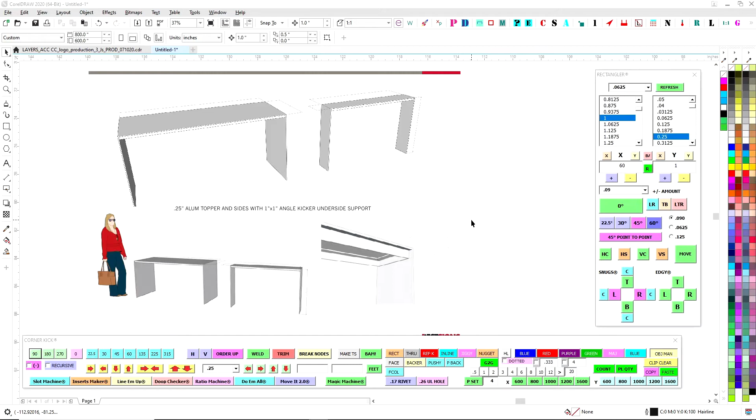Okay, so here's my penny's worth on this. Going by what you got here, I understand you got the 1/4 inch and you got the 1 inch frame. So the idea here, I understand, is trying to keep it clean. You're not going to be able to score and bend this. First of all, the 1/4 inch doesn't like to do that, but we only have 6061 in stock.

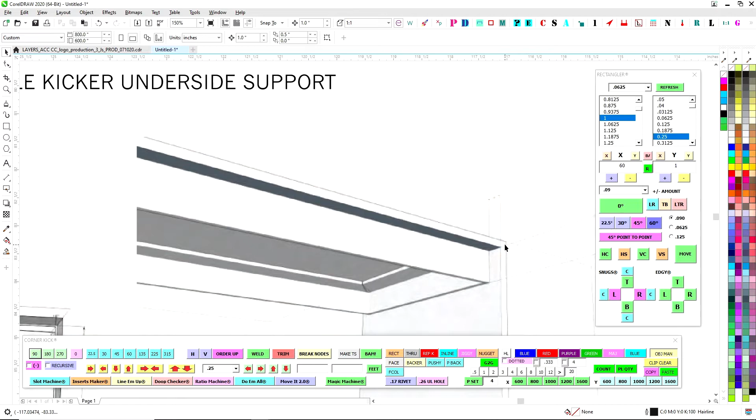Even if you were to bring in 5052, you'd be trading off the fact that the 6061 will crumble and break, and it'll just snap in half. The 5052 will be curved more than the 6061. So you're going to have two problems there.

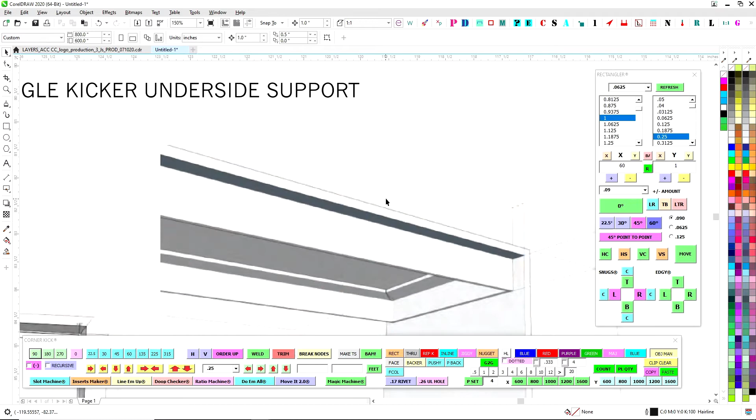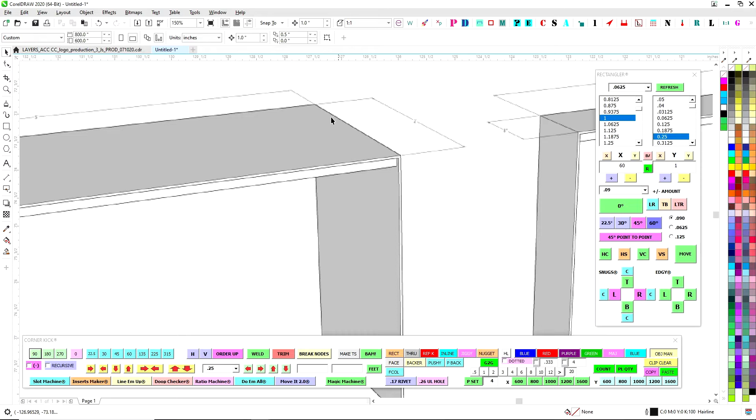The main problem with the table is the axis. So if you were to look at it, think like Corel or whatever. Let's say we'll call this the x-axis, this the y-axis, and this the z-axis. To get strength, you want to have as much distance ventured in multiple axes rather than just having one, which then causes the other two to have no strength and will fall.

So if you're going to do this, then you could plug weld here. You'd have to make this frame first and foremost, weld it really well all the way around here, but then this is going to bow in and this is going to bow in ever so slightly. You want to have strength along this z-axis here. This is the xy. So moving that strength down here means you're vulnerable there, and you end up creating two z-axes for this whole thing to be angry about.

So you'd have to then reattach closer to this z by doing plug welds, and then you could weld along here. Okay, and then you could weld here, but you still don't have any strength here. So that is a possibility, but it's not going to be super strong. And then the other way along here, you're going to have to plug weld. You can weld along this edge, but you can do plug welds along here.

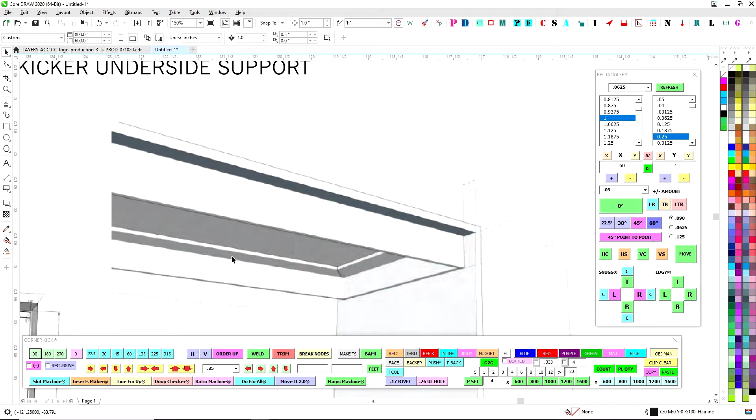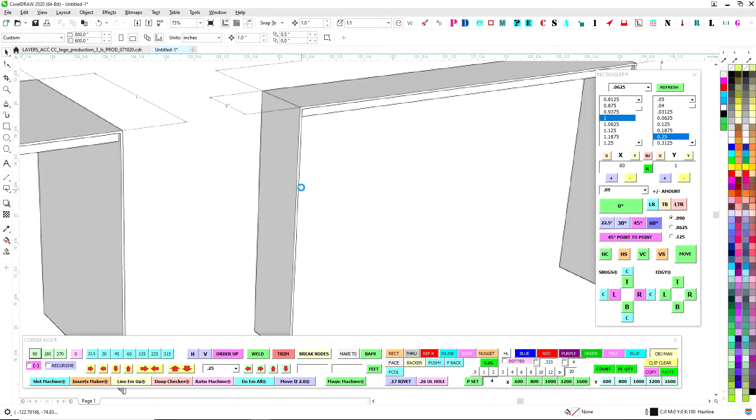All of that's great. It's just that you're going to have a lot of heat affection. This is going to probably get pulled in a little bit. You'll have heat affection up top, but it still won't be super strong. Even though you kind of take care of this with a little bit of welding here, and you'll have these plug welds on the inside, even though it's 1/4 inch, it's definitely going to wobble. I understand if that's fine, then that's great. So that could be a solution.

The other solution is to get that z-axis as close to the z-axis as possible by removing this piece. So you could just do two straights right up against. That way you can then weld this to this and burn it along the inside to itself. And that's going to be your highest strength. That also gives you 1 inch worth, or 7/8 worth, of y-axis. And then again, you're just back to plug welding along the X.

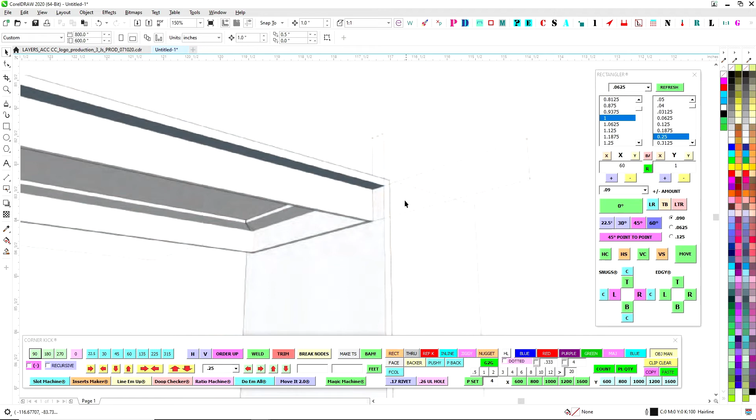That's okay too, but again, this might hump up a little bit, and you're going to have to make sure you have this just right. The other problem is when you burn this, you'll get the strength, but then this is going to pull in. And there's a chance that once this gets all heated up, they'll rock back and forth a little bit. And again, if you put your hand on this and wobble it back and forth...

Depending on, now if it's just her and it's just sitting there. On a continuum, you have art over here and you have a table over here. The definition of art is it has no other function other than itself. And the definition of a table is stable. Table's right in the word. So obviously you're trying to balance that.

So, if this is just going to sit there and look pretty, then fine. But if people are helping her out one day and they're pulling on it or they drag it, there's a chance that this might let go. So, anyway, that's just the way it is.

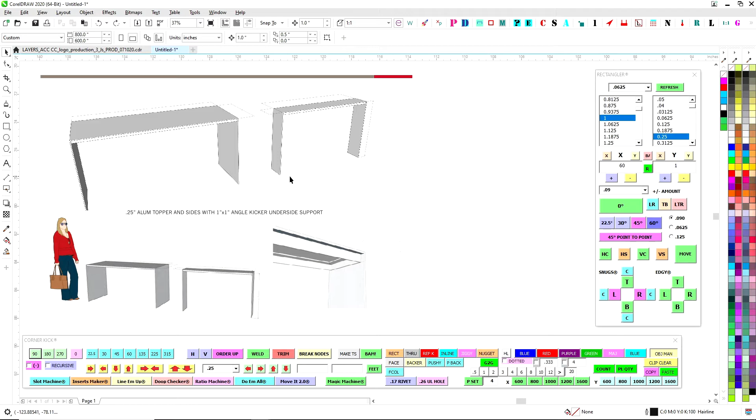If it's just going to sit there and look pretty for its life, then fine. But I don't know if it's a trade show thing or if it's going to get moved around at all, or people don't understand and they might sit on it accidentally, whatever. I don't know how strong that'll be. But again, you could do it that way.

Or the way I was kind of spitballing is, as usual, using our folding method. You just kind of trade some things for other things. So what you would do is do our 09 bend, do a 1 inch here, but also have legs that go down 1 inch all the way. Put our jigs on the inside, burn it. See, that gives you 4 inches here on your X, 4 inches on your Y, and then we'd also be able to burn the Z.

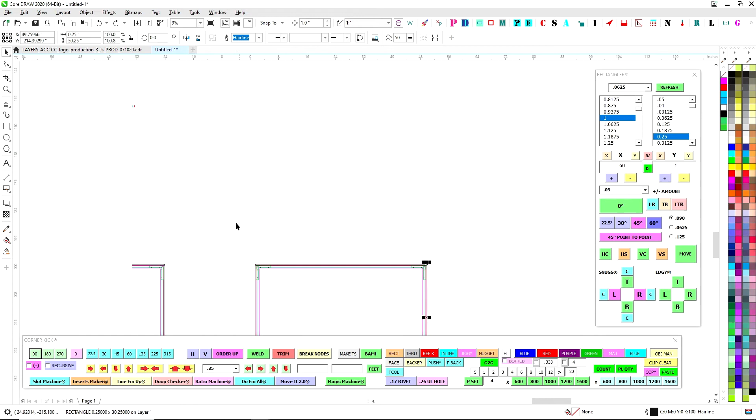And this is just 3 sides of our normal cabinet construction. A cabinet of this size with a 1 inch is super strong. So we would already be starting with a good strong piece, and this is 90. When it comes off of here and we burn this, it's 90, so we have a good place to start. Then we can Lord's the 1/4 inch to it, and you're just basically adding this 1 inch dimension down this way. I understand it's not as clean as that, but you for sure would be a lot more rigid.

And what you could do as well, if you want to, we can cut this on the table at a full 45. We can bevel it on the table, and then you could even inject Lord's along here when you bring these pieces together, and that would give it a lot more strength as well. That way the 1/4 inch is just looking pretty and isn't doing the work, and in here is doing the work. And then you trade off all your heat deflection, because this will be nice and cool and level. There won't be the heat deflection.

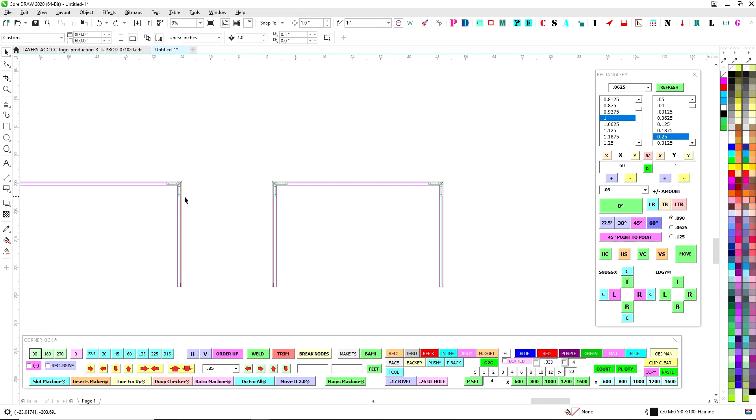We maybe add 1 cleco hole here and 1 cleco hole here on the face of this, and we trade all of the, let's hope the table's straight, let's hope the welding doesn't get all kooky, and then we have all our heat deflection, we have to bondo that and sand it and make it look nice, plus you have the wobbly, versus knowing it's going to be more stable. But we trade it for prep time, and then they can just take their time to make all this go away.

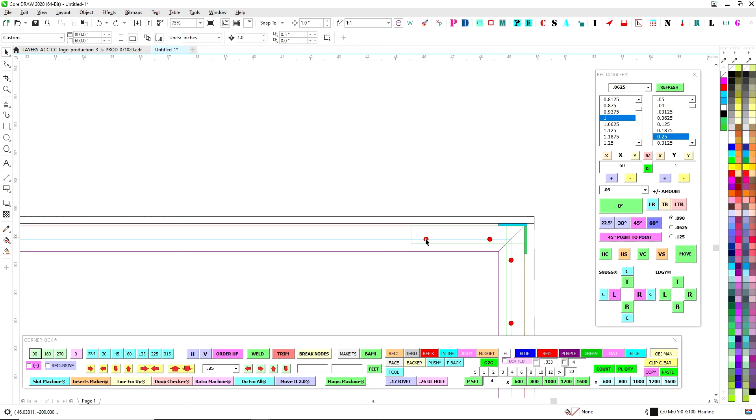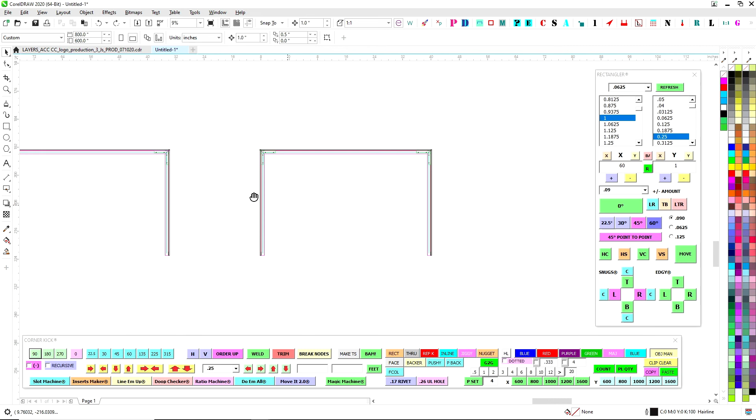We could even Lord's these shut when we're done and sand them flat on both sides. You will have a little bit of welding on the inside of the jig there, but that would be no different than welding on the inside here. I don't think anyone's going to see it. So either way, you could do it the way you have it, or you could do it this way. But like I say, we're just trading a more known and possibly more stable build for having to spend a little more prep work to make it look good.

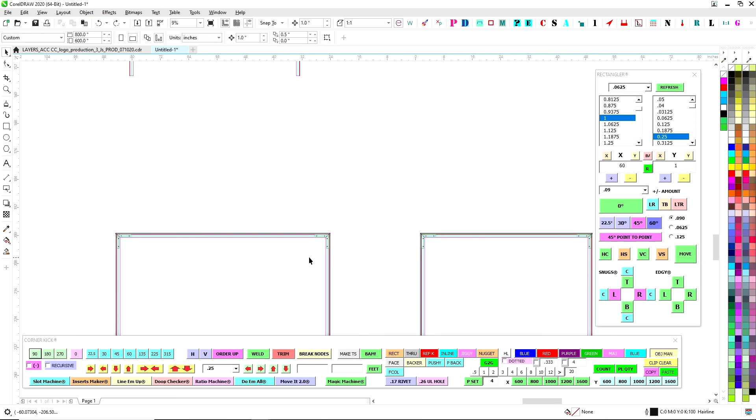If you imagine this in 3D, you'll have this way, and you'll have this over here. You have a 1 inch, and you'll just have your score mark and bend, but that's no big deal. It'll come together possibly a lot more just knowing what we're going to have, and then just dealing with making seams go away. Or you could make this part go long, have this part be flush, and then just deal with the seam on the side. Again, just spend the time to museum bondo this and make it look really nice.

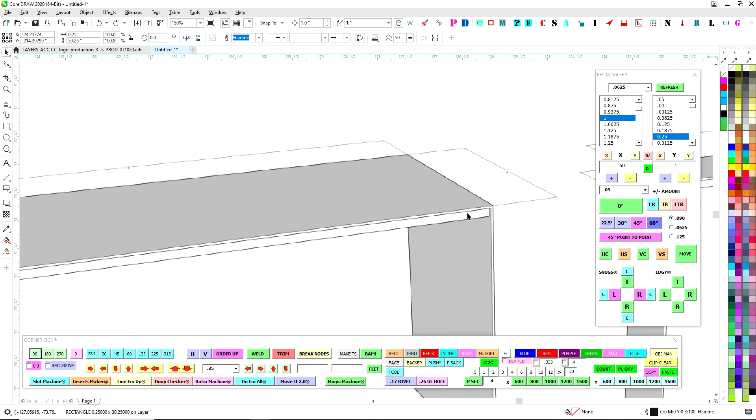As opposed to, here it would also look nice, but you're going to have how the heat's going to affect this. This could be bent a little bit, or this could bow up. Also making sure of your table, the skill of the welder, and how that's all going to turn out. So this could be one way, or it could be this way. Either way, that's how I see it.